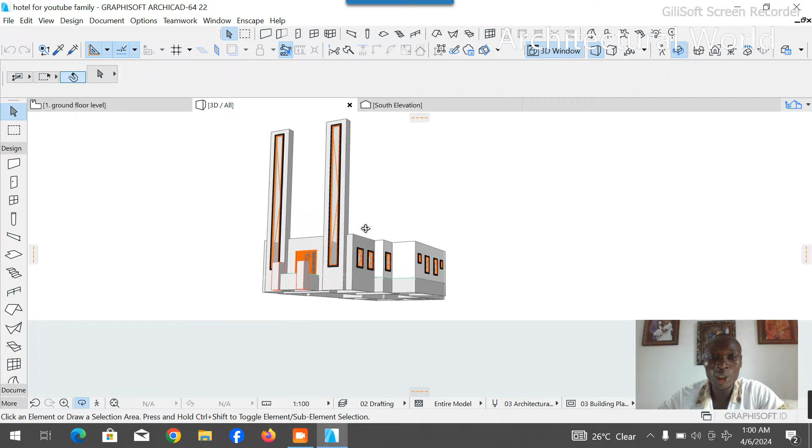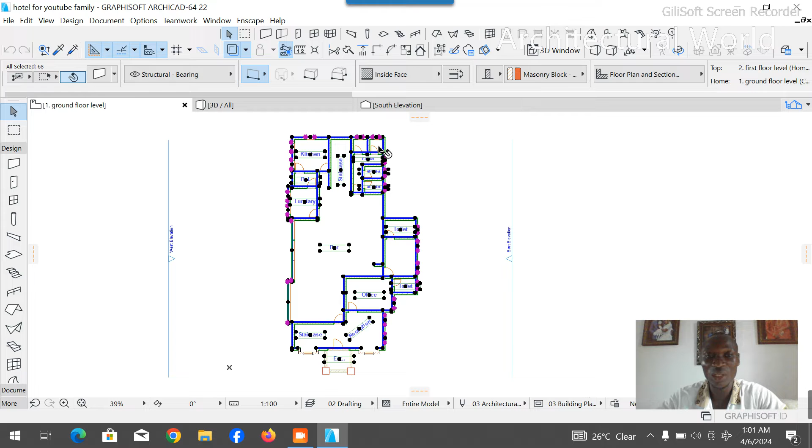So today we're going to put our slab. First, let's put our slab. Now, before we put our slab, I always tell you guys one thing: since you're creating an elevation, though the up part is going to be different, I prefer you copy this wall. Then once you copy this, you uncopy this because you won't be needing this column. Then you uncopy this because you won't be needing this part either. Let me check. Okay, you won't be needing that part either. So you come back here, you uncopy this. Perfect. So right here you'll be needing the rest of the part, but not the internal part, you'll need the external part. So you press your Ctrl C, which is the copy layout. Then we've already gotten what we wanted.

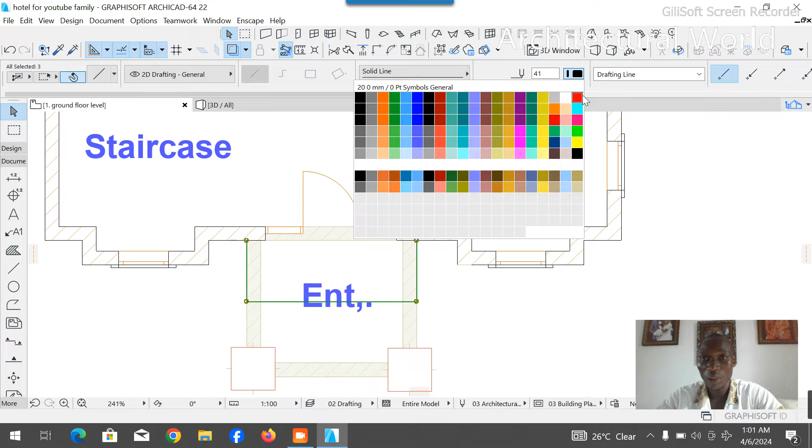So let's put a slab here. First, before you put a slab, you pick your line tools because I want to create a landing, a porch here, so I'm going to make that my porch. Let's say I need 1 meter from here, then I'll come down to the spot, then take this, that's all, 1 meter. The reason I created that line is to have a proper guide. So this 1 meter slab, let me change this, then let's make this dash.

Okay, perfect. So now let's pick our slab tools, pick our design. You come to slab tools, you come this way. So the slab is 150 millimeter, which you know. Then the height, our elevation height - what's the elevation height? Let's check that, let's check the height of our elevation. Is it 3.4 or 3.1? Okay, 3.4, we use 3.4.

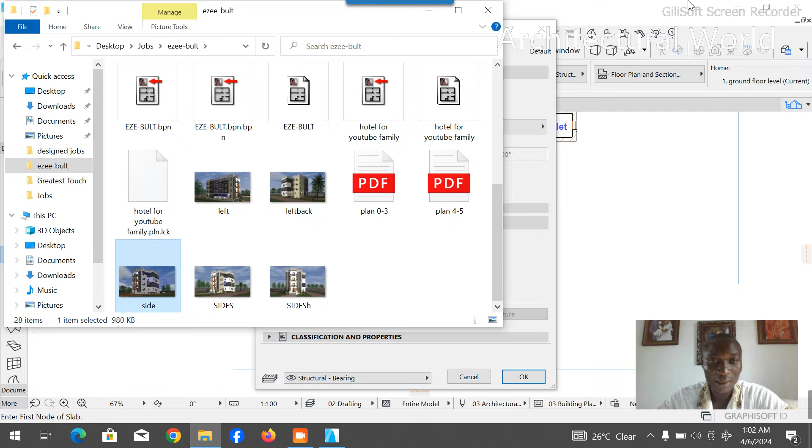So let's go back to our slab tools. Don't mind my voice, it's a little bit down today. So let's go for 3.4 meter. Then let's come here, the top layer is glass. Then the edge, what do you think? Wait, let's look for the 3D, guys. Okay, let's use this. Okay, the edge, the slab is not reflecting, which automatically means it has the same background with this. The slab has the same background with this.

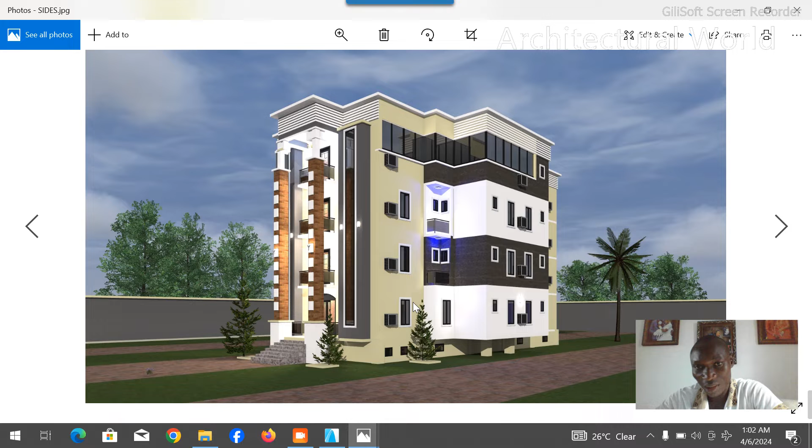Was it this one I was using? Let me check the other side. I have two sides, I want to check. Okay, this is the slab. This is the one we're gonna work with, which means we have to come this way.

Okay, let's pick all this off. Then the slab is okay. Then we'll click. Let's turn this on. Let's put it here.

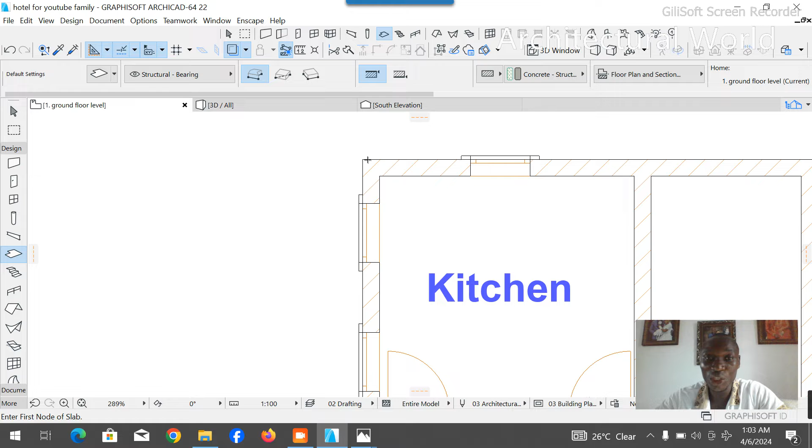Okay, I don't want to rush my class. You know very well that I'm not the type that rushes my class. So I'll pick this edge. Make sure you pick all edges properly.

Okay, come this way. This is how to create your slab. You come this way, you pick this edge, pick this edge, you pick this edge. Make sure you're picking all the edges. It's very, very important.

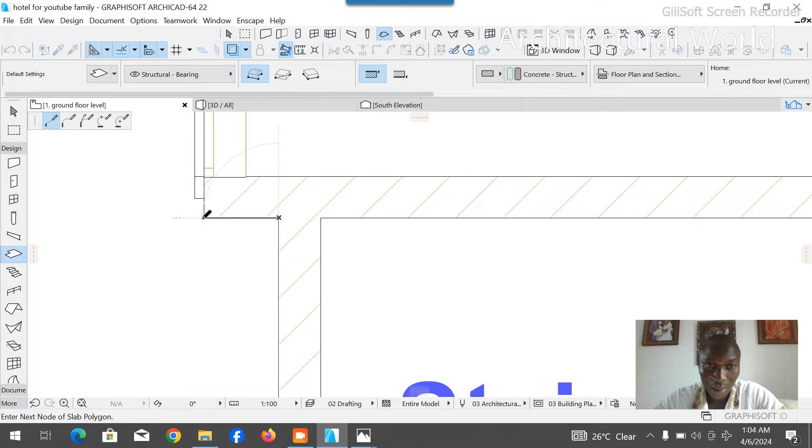Come this way, take this, take this. Okay, almost. Take this, okay, let's go, take this, okay take this. All edges are highly needed.

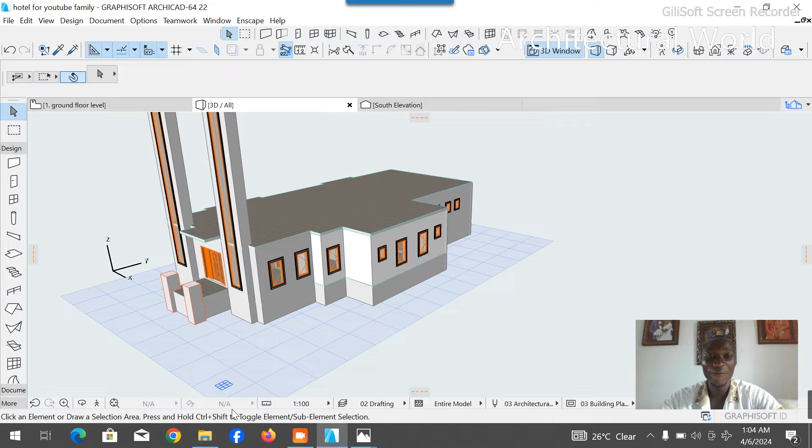What did we use on this page? Okay, I'm going to edit that later. So we have our slab right here. Now this stuff has just been slabbed, you can see very well. It has just been slabbed.

So you can try to see the inside if you so much desire. You can see very well, this is the inside, okay. So please don't forget to save your project, always remember to save your project.

So now the next thing we're going to go to, since we're through with our ground floor, we're through with it. So the next thing we need is our first floor. So from this ground floor layout, you come down to the story, you click your first floor level. We labeled it accordingly, so we're clicking our first floor level.

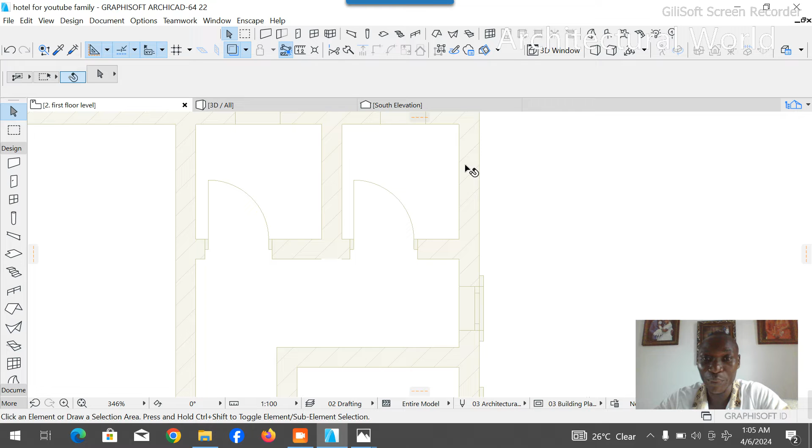Now, if you check for my first floor layout, this stuff is still being printed, that is because the trace icon is being activated. I'll always tell you that. Then if you see this spot that I refused to copy at the first stage is still reflecting, that is because I elevated it to the final floor. So I really don't need to copy it because it's already elevated.

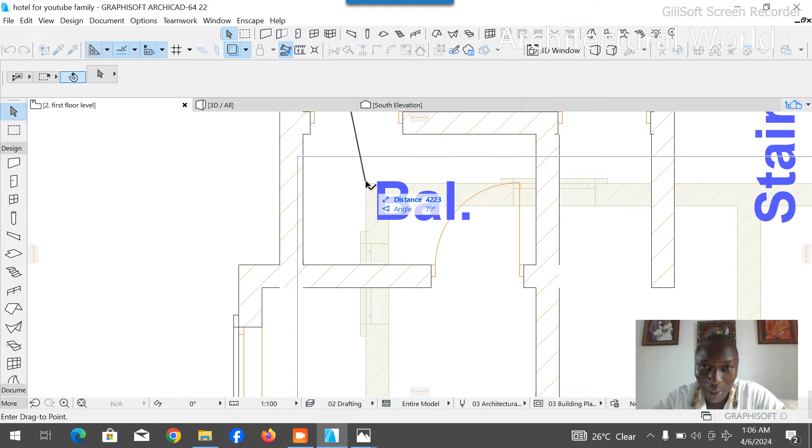So all I just need to do right here is just click my paste layout and paste this item right where I want it. Now I'm going to use my Ctrl D, then pick it to match the merge. I'll come here, I'll paste it here. Okay, perfect, now I have what I want.

Let's see that on 3D before we edit. Perfect, you see, I just created my first floor. You can see it very well, I just created my first floor. This is the first floor, but the setting of the first floor is different.

So now what do I do? I come down to my story, I'll go back to my level. Now this is where I'm to create my rooms. I'm to create my rooms here, okay, I'm to create all my rooms here. So how do I do that?

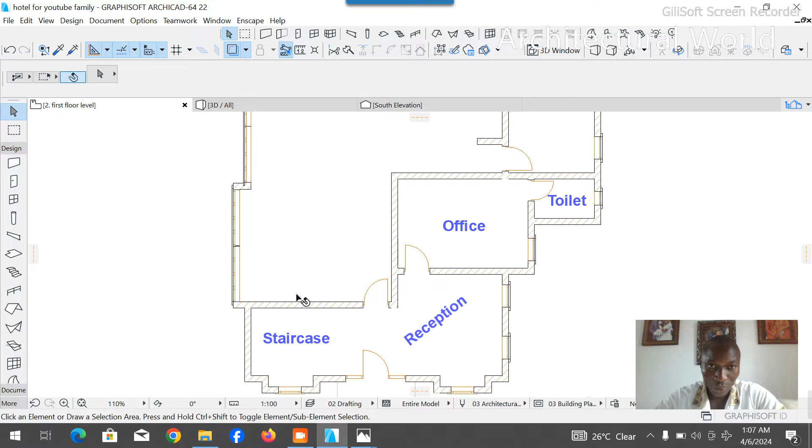Now, I have to scatter the whole of this thing, excluding this staircase. So where should we start from? Okay, let's start, let's take this angle first. This is no longer reception because we're trying to create another room here. So always use your line.

At this spot, you need your line tools. So now let's look for 3.6 meter. Let's check something. Exactly, this 3.6 meter, and let's look for 3.4 meter, 3400. Okay, okay, this 3400, this 3400.

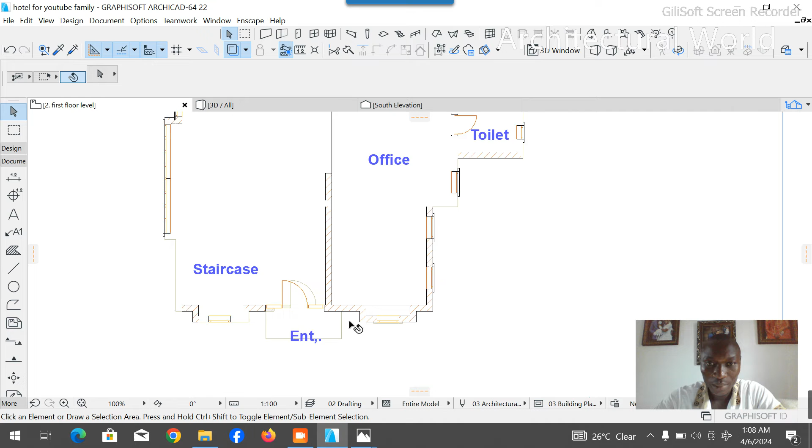So I need this wall to be here, then I need this door a little bit backward to the spot. Okay, perfect. So the same thing is going to occur from the ground layout. Same thing is going to occur. So now I have my 3.1 meter.

Okay, I don't need this wall, this door, I don't need this door. Now I just got a room. Please follow up what I'm doing. I just got a room.

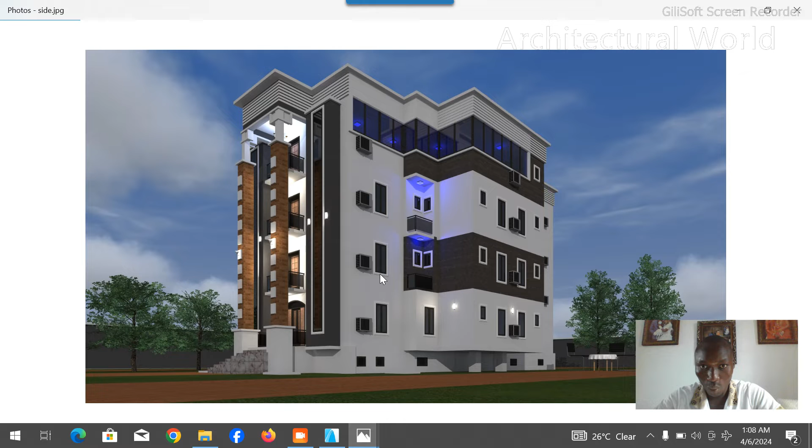If you check our 3D, we are having just one window here, even from the reception. So why did I create two windows? Let's check something. Okay, we're supposed to have one window. So I think maybe the ventilation was hot. I think this two window is pretty cool though.

Let's say we already have this as a fixed light. This place is not accessible, so one window for this space is pretty much going to be hot. So let's try the two window. If it doesn't fit in, we'll pull it out.

So the next wall we are looking for is 1.23, 1 meter. Okay, let's say 1243. 1243 is the next wall we are looking for right now. Okay, that's the toilet to this room.

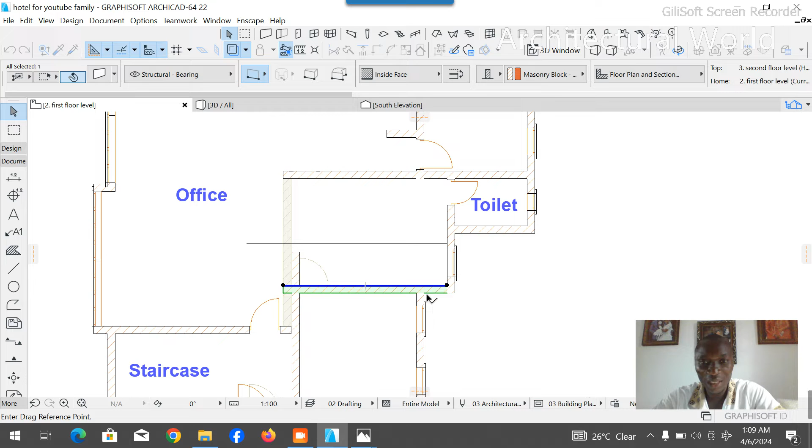So let's take this to the spot first, then create a copy of this and merge it here. Perfect. So let's take this off, then increase this to match this even above. Right here, we can turn off the trace so you don't make a mistake. So let's cut this off and cut this off.

Then let's have a toilet here of... let's have a toilet of 2447. Okay, because the leftover part is going to be walkway and lobby.

So let's take this wall here, copy this wall to the spot, cut this off, cut this off, and take this off. Okay, then let's cut this off. Perfect. There's going to be a wardrobe here during the finishing.

So we have the first room here. Okay, so we'll be creating, designing, and putting our doors at once. So let's have our first door here. Sorry, my bad. So let's have our first door here.

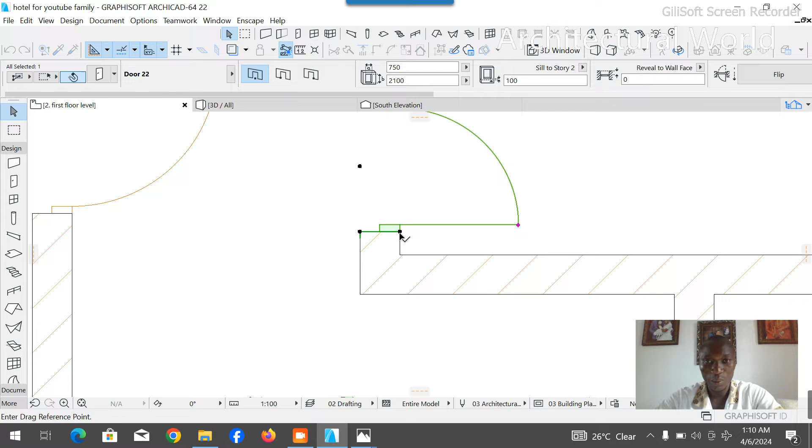Okay, then let's change this door to 750 millimeter, toilet. Then let's have our entrance door here. Okay, perfect. So we have this here. Okay, so it's the owner's choice. They could either put this door here, but I always prefer my doors to have a resting end.

So let's label this toilet. Then let's label this room 2, because we already have room 1 on the ground layout. So let's label this room 1, room 2. Okay.

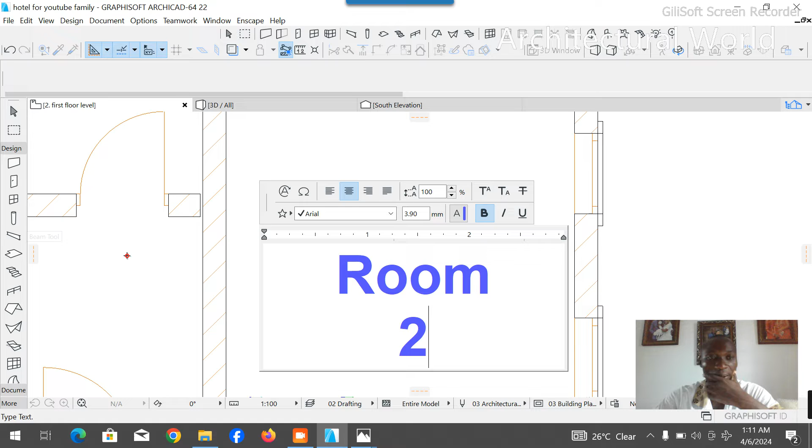Now we're going for the next room. For the next room, room 1, room 2. Okay, there's going to be a complication here. Now let's pick the next room, toilet.

Let's go back to our document and pick our line tools. Then let's pick a toilet of 1.3 meter. Is it fit in? 1300. That's what we need here, toilet of 1.3 meter. Then let's split this wall to this first because I need it.

So let's bring this wall to the spot. Okay, so let's match this upward. Take this off. Okay, so we take this off. What do we need? We need a length of 3172. Okay, 3172.

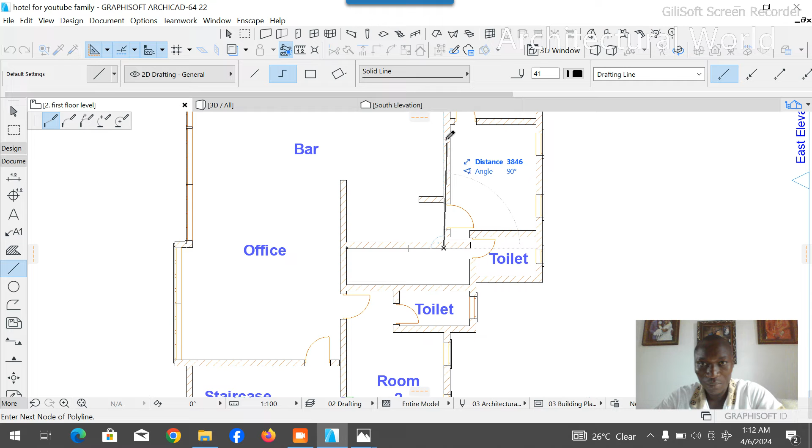3172. Okay, sorry, my bad. We need a length of 3.4 meter, 3400. Exactly this wall. So we have this wall right here.

So we are taking this door away from the ground layout, taking this door away. So this should match this spot. Okay, so we don't need this door either. This is the ground floor we're trying to scatter, so don't get confused. You're taking away the ground floor.

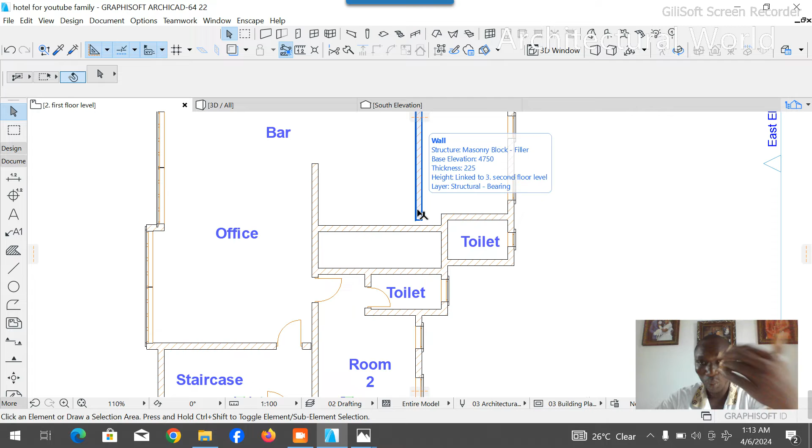So I'm trying to work what I want, the way I want it. So now I need a toilet wall here. And first, let me align this to this wall. Then I'll pick my line tools.

I'll take 3172 from here and paste it here. Okay, so I'm creating a toilet wall here and I'm going this way. Okay, I'll take this off.

I need a window here, no matter how small it is. I need a ventilation to this toilet. Let's try 500 millimeter. Okay, perfect.

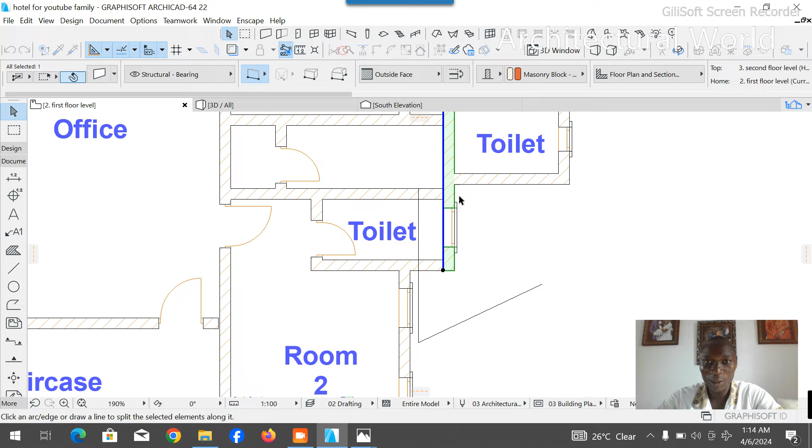Then let's trim this wall. Let's split this wall off and bring this wall back. Let's move this wall back to here. Adjust this toilet this way. Okay, I think we should take this off, then move this backwards to this, then take this.

Let's leave that to fly first. What do we have here? 750 on 5. What do we have? What's the size of this window?

Okay, this is wrong. So let me check the setting of the window first to see if it is a toilet window. Okay, so I'm going to change this window to 500 millimeter, the width, then I'll change the height to 750 millimeter.

I think that's what I'm using. Let me confirm it. Okay, 700 millimeter. That's what we're using, 700. Okay, then I'll change the sill to story 2 to 153. I'll do the same editing here. I'll change this to 500, then change this to 1530, then change this height to 700.

Okay, perfect. So what do I need? I need a window here. So let's go to design, I'll pick our window tools. I'll change this to 500, same way. I'll change this to 700, same way. Then I'll change this to 153. I'll place my first window here. Then I'll move this, rotate a copy of this and paste it here.

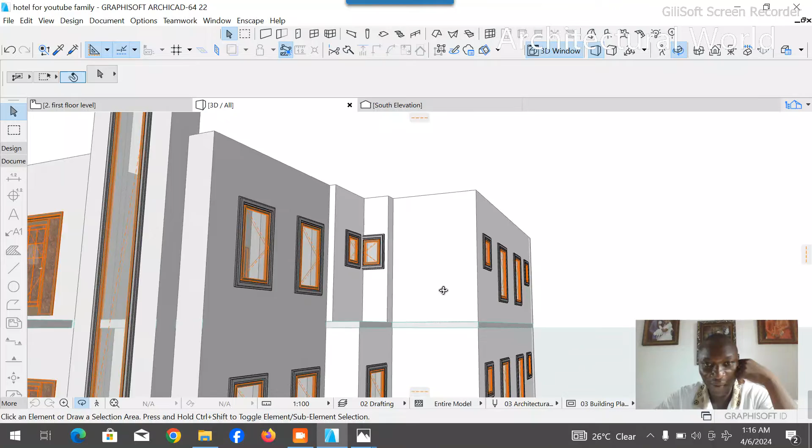Perfect. So let's take away all this because we won't be needing it anymore. Likewise, let's take this off. So we have this, let's check that on 3D. Okay, you can see we just created this. Yeah, this is what we're currently working on.

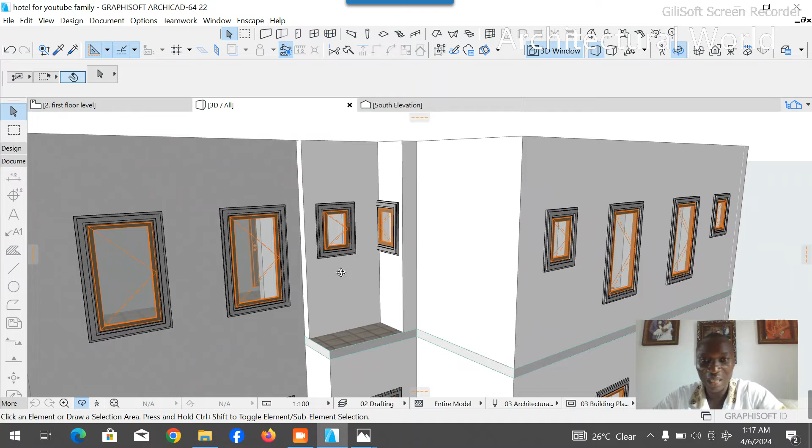This is like cross ventilation, so let's just move this window to come this way. Since there is a space there, let's move this window a little bit, so it doesn't look like the air are competing with distance. Okay, I think I'm cool with this. So let's have this have opening to this way, while this have opening to this way. It's perfect that way. So let's go back to...

Okay, toilet, this toilet. Perfect. Now the door of the toilet ought to be this way, so I'm changing this door to this. Okay, reduce this to come this way.

Okay, perfect. So what next do I need? I need a room of 3.2 meter. Let's say 3203, that's what my design stated. Okay, let's have this here. Let's increase this.

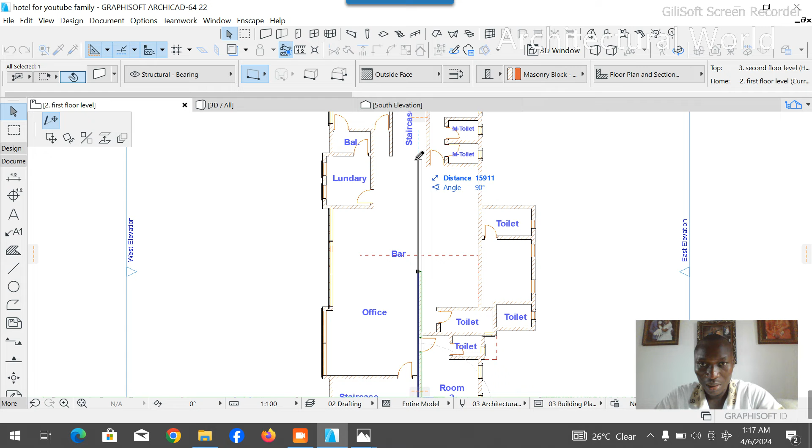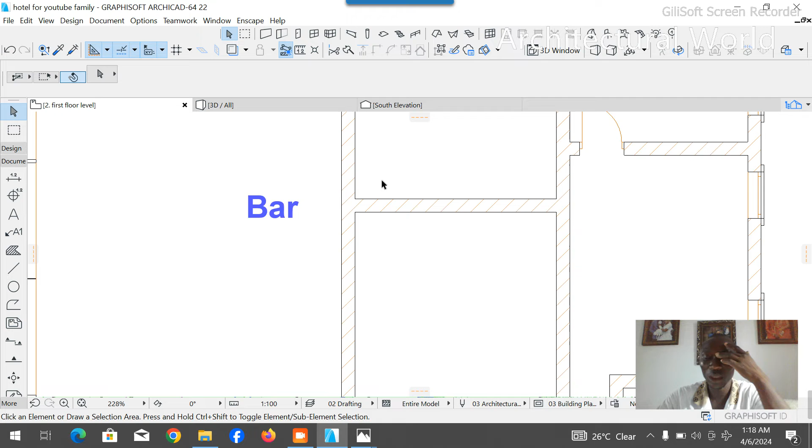Let's go. Let's create a wall here. Move your wall here to this. Copy, paste here. Take this off because we won't be needing it. Align to margin. Okay, now we just have a room.

This room is using external ventilation. That is what this room is going to use, external vent from the walkway. Definitely there's going to be AC everywhere, so it doesn't really matter though. So that's why this is like a room that needs its ventilation from sunlight. So it's going to be more of AC.

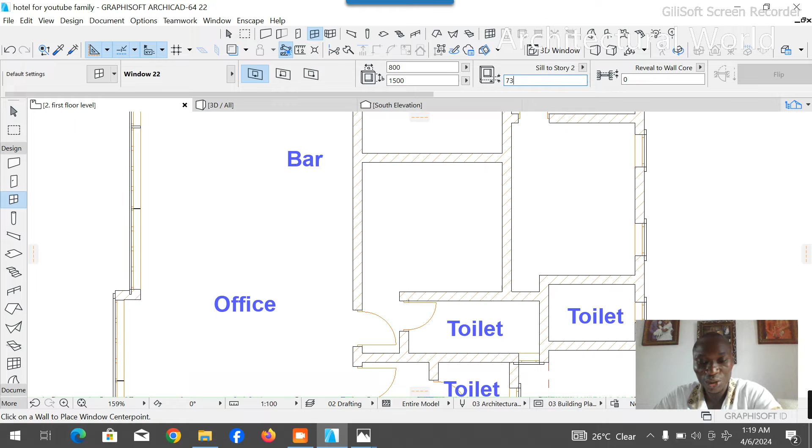Okay, so now let's put our window here. Let's go for 800, then let's go for 1500, then let's go for 730 G to sill. So we have the first window here, we have the second window here. So let's rotate a copy here.

Let's rotate a copy here. Okay, bring this to the spot. Please, you know I don't rush my classes, so kindly be patient with me. Okay, so we have this. Let's see that on 3D.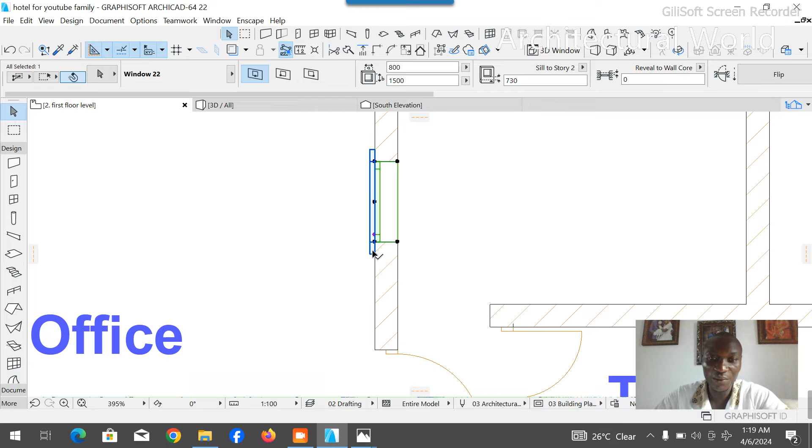Okay, you can see it very well. This is the room we just created. Sometimes when you are creating things, always make sure to follow them up, so it's going to help you a lot. Let's drag this off, so the middle can be used for TV, or for bed at length, whatsoever or howsoever is being arranged.

This is just sunlight, this is just sunlight. Let it not be like it's a sealed room. That's the purpose of this window. It shouldn't be like it's a sealed room, and it's going to be a slide window, so it's not really that necessary, but let it not look as if the room was sealed. So that is the reason I'm creating that stuff.

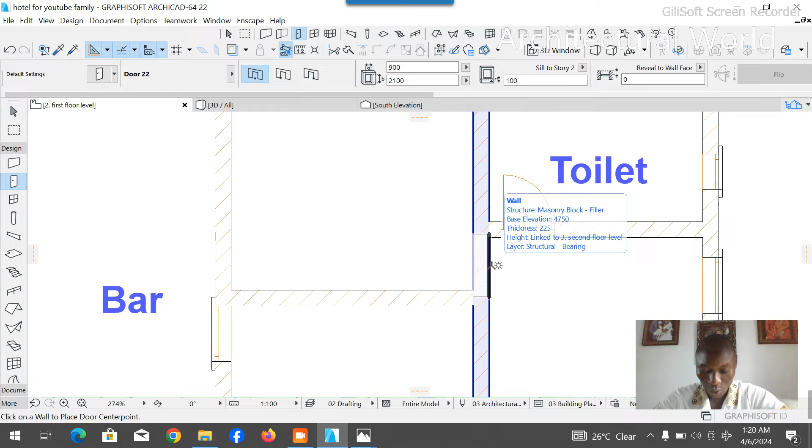So let's align this to the spots and create extra benefits for this particular toilet. Okay, now what do we need? We need a walkway between these to access this. First of all, let's put our door, let's put a door here, a door of 900 on this spot. Okay.

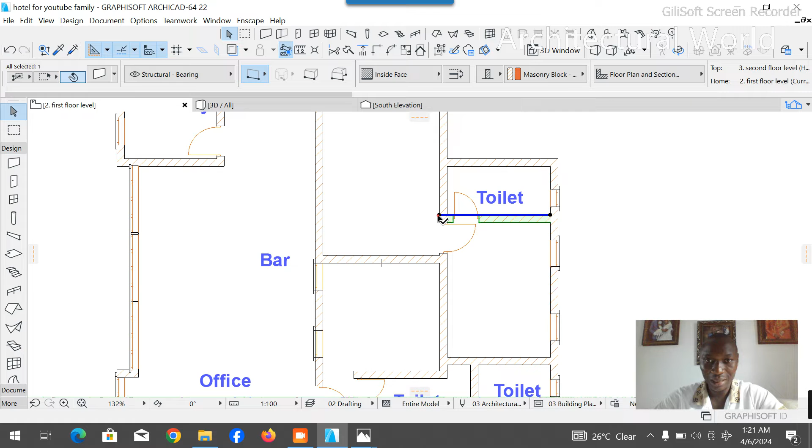Okay, 900 on this spot. So that means this has to go back to this spot. Okay, we have the 900 there. So let's create a wall here. Let's allow this wall to fly. This is the lobby to access this room.

Now you go through these to access this room. What's this? This room 3. Okay, this room 3. Now we have this room.

Let's have our room door here, toilet door. That's 750 millimeter. Okay, toilet door. Then let's take this toilet door off because it's no longer needed for this room. So this is gonna be room. Let's say 4. Let's make this room 4.

Okay, room 4. Later, the owner is gonna label it the way it best suits him or her. So I'm just trying to create my design. So what do we need now?

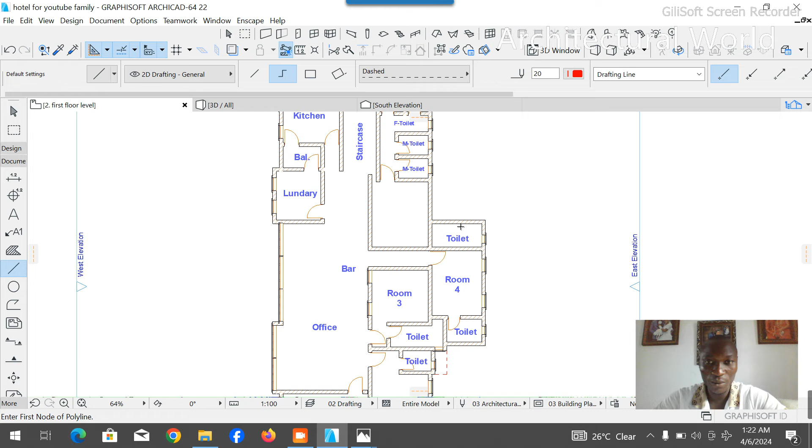We need another room of 3.4 meters. We need another room of 3.4 meters. So we're going to pick our line tools and boom, 3.4 meter, 3400.

Okay, 3400. So I'll move this wall to this spot. I'll move this here to this spot. Then I increase this to this. I take away my guide. Okay, that's 3.4 meter. So it already has its own toilet.

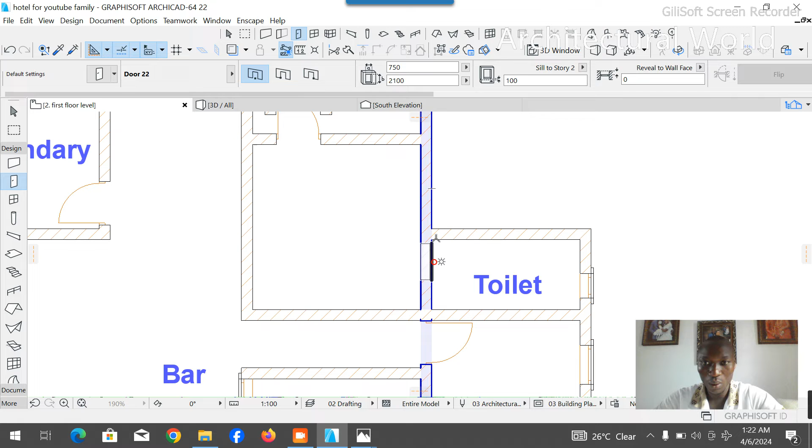So I'm just going to put my toilet door. I'll go to my design, pick my door, then put my toilet door here. Okay, then I'll go to my window. Let's come to window. I'll put my window here.

I'll copy my wall extra. I'll create a copy, duplicate, and move one copy here. Okay, I have that. So what do I need? I need the entrance door. So I'll come here. I'll put the entrance door of 900 millimeter and place it here.

Okay, now this is room 5. I'm just taking them step by step. This is room 5. Okay. Please always save your project.

So what do I need next? The next room I need is going to be 3 meters. Let's look for 3 meter room, more in length. Let's check 3 meter. Okay, 2950. That's what we're going to have here.

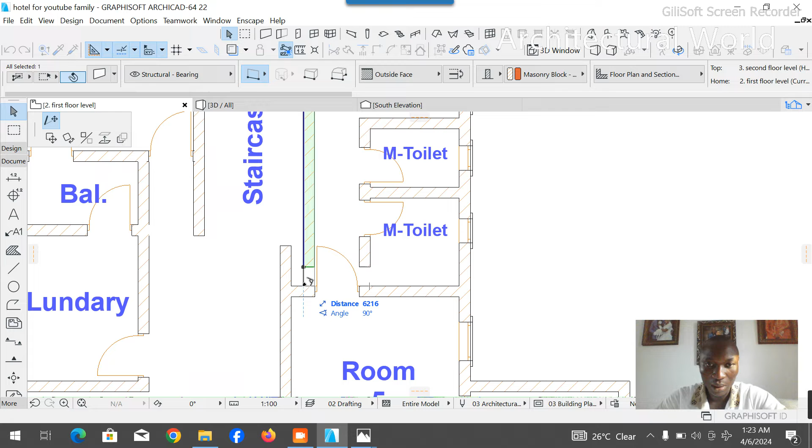Let's come this way. Let's take this off. This is a staircase room. You can't alter it because it's flying from the ground layout, so you can't touch it.

So let's say 2 meter. That's 2 meter. Okay, we'll take all this off because we won't be needing all this stuff. We take all this off. Then we'll take this off likewise. Then let's have our door here. Let's put our door here.

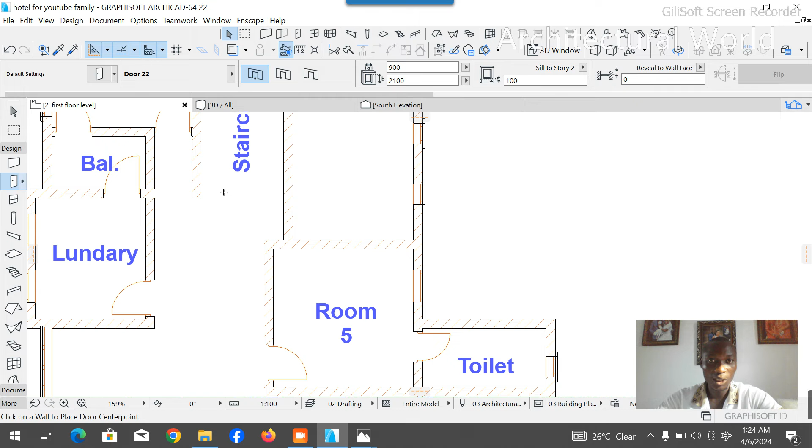Entrance door. Okay, so that's going to be, we're looking at 4.1 meter. I told you it's going to be more in length, so we're going to take 4.1 meter from this wall. 4.1 meter, let's say 4100.

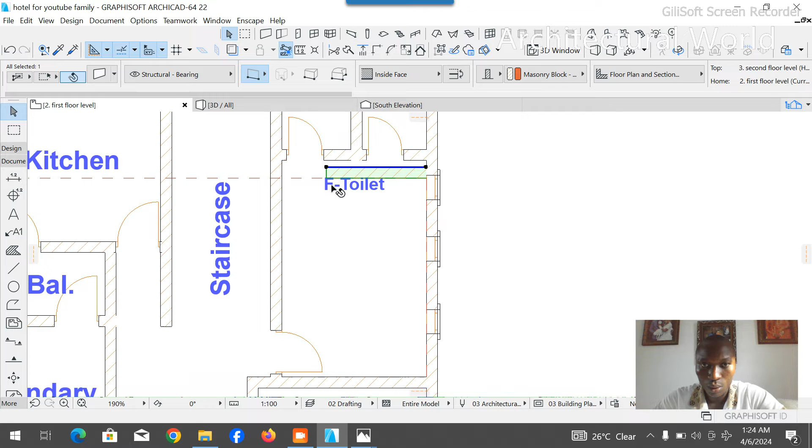Okay, keep your guide here. 4100. You move this wall to this wall. Okay, we expand this to this, delete our guide. Okay, we take this off.

Now these are all toilet doors, so we don't need them. All toilet windows, so taking all off. We take this off, take this off, and take this off.

So we will be needing double window here for ventilation. So we place the first one here, take the next one, place it right here.

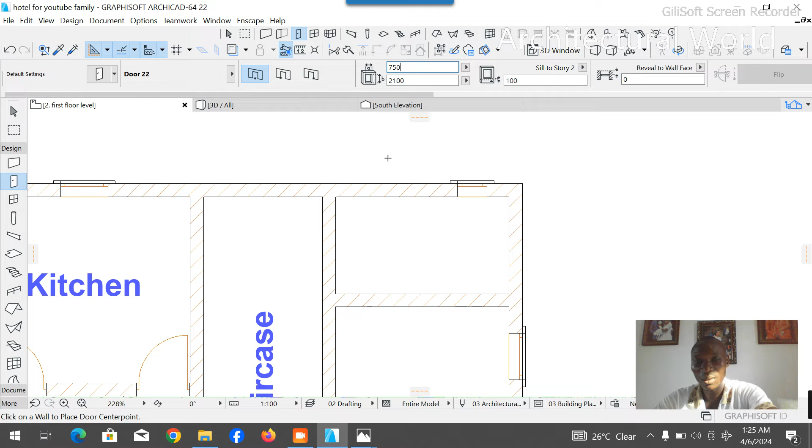Okay, now we have here to be the toilet. So we take away one of these windows. A toilet cannot have two windows, it's not possible. So we just come back to our design tools, pick our door layout, then reduce our door size to 750 millimeter, then place it here.

Okay, now we have our room 6. Okay, then let's take our toilet tools. Let's paste this here.

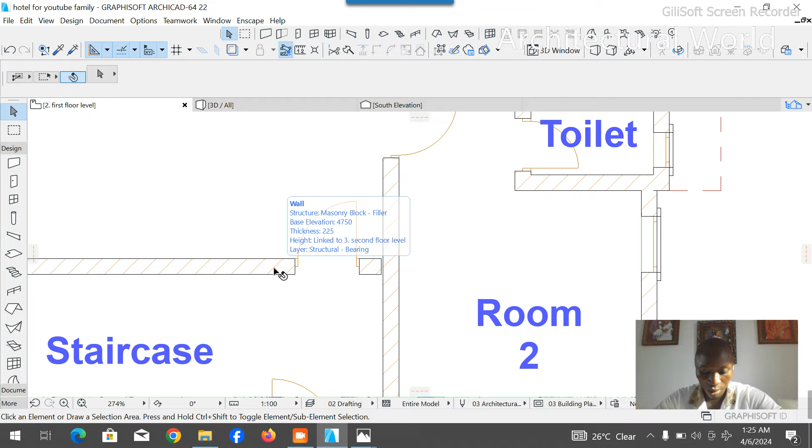Okay, now guys, you can see we have our room 1. This is the reception. It still has to flow. We really don't need this door here. Let's just hold on. We have our room 2, our room 3, our room 4, our room 5, our room 6. You can see, like I always tell you guys, you have to learn how to minimize and maximize your space.

You can also learn how to use the little space you have to create that amazing design. If you check this well, you can see the arrangement looks complicated, but it's well arranged. This will help you outrun any kind of wastage.

This room was supposed to be a waste, but it was created from the smallest part of it, and the room size is okay. Let's check the room size. Let's pick our line tools. Let's say we have a room size of 3.4 meters by 3.1 meters. So at least it's perfect.

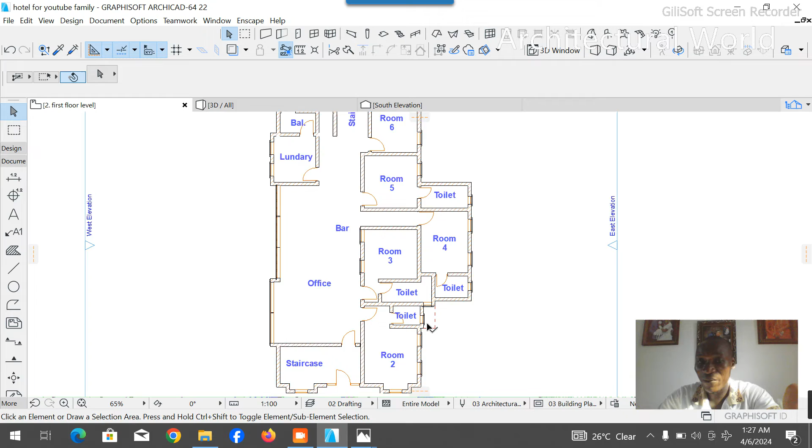Now it has its own toilet. We might have an issue of how the toilet is going to have ventilation, but let me show you, it acted like extra beauty to the design. I was still able to create a form of connection between the toilets, just for the ventilation to push through. So always bear that in mind.

If a client contacts you for a job, it's because the client wants you to use your brain while he pays you the money. So don't just design because you want to create design. You have to design because you have the passion to do the job. It's only when you have the passion that you can have the pay.

So let's continue from where we stopped. Let's pick it from this angle. Now we're looking for a room of 4 meters. 4 meters, okay, that's what we're looking for right now. Perfect.

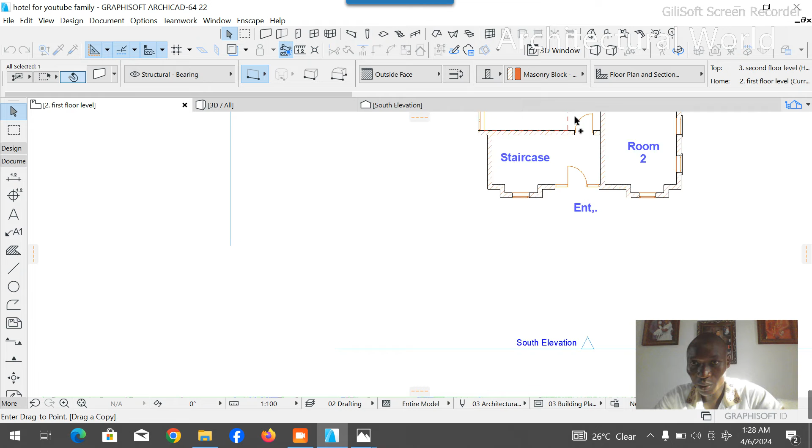So we're going to take this wall, I need a shorter wall because it's going far. Okay, let's come this way. Let's place this here. Then I have to take this off, then expand this. Okay, now this is my lobby. I told you I don't need this door. This is my lobby.

Perfect. Now let me check the size of my lobby and see if it's okay. 1.3, I think that's perfect. Not bad for a lobby. 1.3 is okay. So we'll bring this here to this. We just collected 4 meters, I think so.

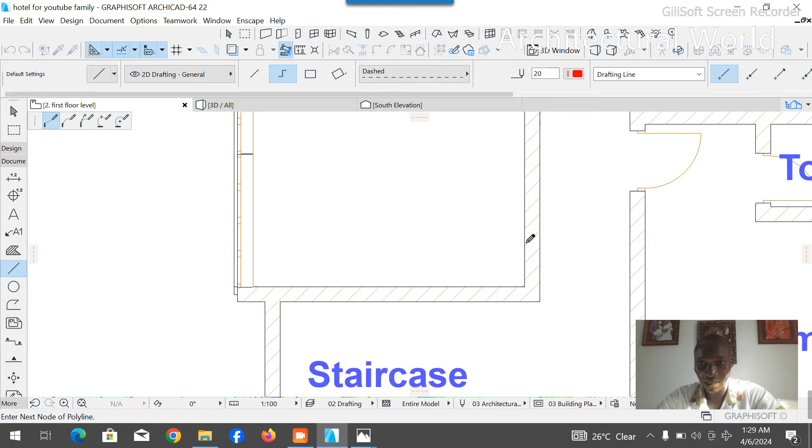Let's see something. Okay, I need 4 meters, exactly 4 meters, because this part is like executive. So you zoom to match. Okay, that's 4 meters.

Whew. Okay guys, I'm late for work, but I still have to do this.

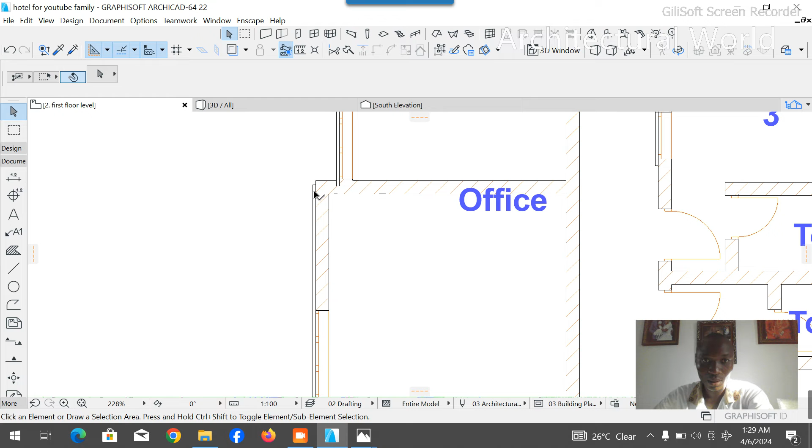Okay, 4 meters square, that's what I want. Perfect. So I'm going to drag this to fit in this. Let's go, let's put this here. Let's take away all these because we won't be needing them right now. Let's take this off. Okay, let's take this off likewise.

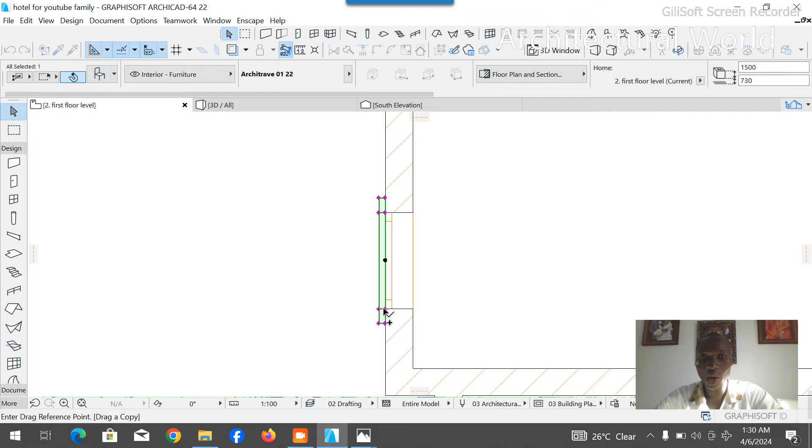Let's go to our design, pick our window, place the first window here, place the second window here. We'll come back to the spot, create a copy of this, duplicate, move to match. Whenever I'm creating a design, I always like doing the model at once, so I don't have to be coming back and stressing myself. So let's pick our door tools.

Okay, first let's create the toilet on this wall. Let's take these glasses off the spot. Take this off, sorry. Okay. Zoom so you can see what you're clicking. Okay.

Okay perfect, so I need my design tools, documents, I'll pick my line. I need a toilet of 1.2 meters, 1200. Okay, so we'll come this way, we'll duplicate this wall to fit in this. We'll take this guide off, cut this, mesh this. Okay, for proper connection.

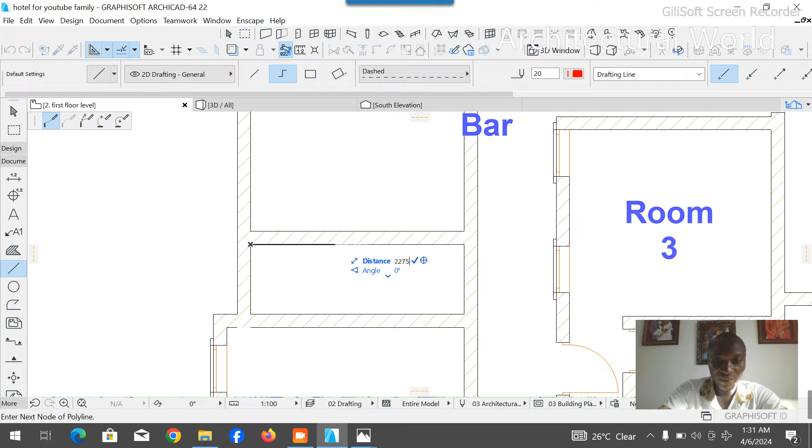So we'll come here, line tools, we'll pick two, take 2275. We'll create a guide here, pick this, we look for this, create a copy of this. Okay, paste it there. Let's take this off and take this. Okay, let's take this door off and take this off likewise.

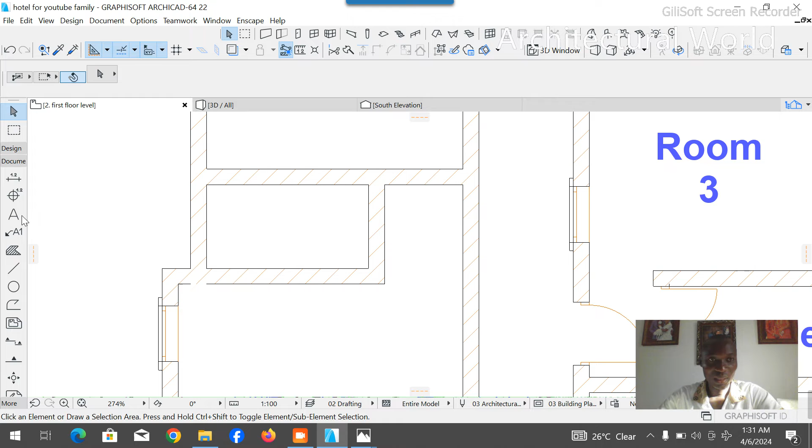So we'll go to our design, we'll pick our door tools. We have our toilet here. Toilet door, we change this to 900 millimeters. Change this to 900 millimeters and have your toilet.

Okay, let's have the entrance door here. Then let's have the toilet door here. Let's take this to 750 millimeter. Then let's create it here. Okay, perfect. So what's this room 6? So this has to be room 7. This has to be room 7. This has to be room 7. Okay, then this has to come down to this.

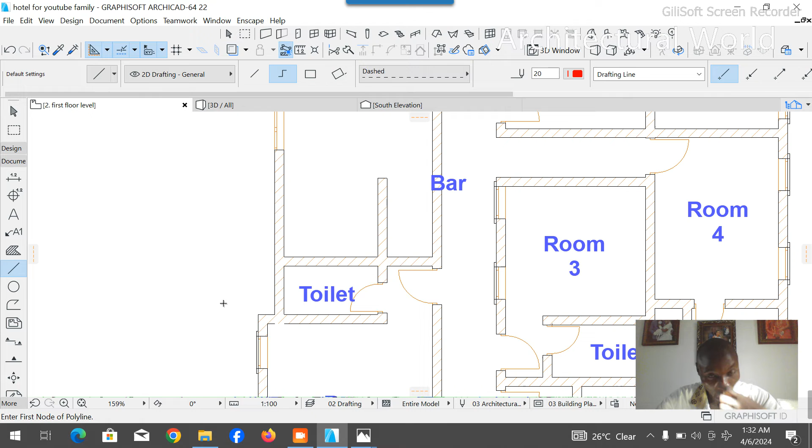We'll copy this. Okay, now what do we need? We need another toilet, so let's increase this. Okay, so we'll come back to our design tools, documents, line tools. Both toilets are equal, 1.2 meter, 1200. Okay, take this, bring this, create a copy of this, paste it here, delete this off, take this off, take this off, go to design tools, door layout, 750, place it here. Okay, we change this to 900 millimeter, place the entrance door here.

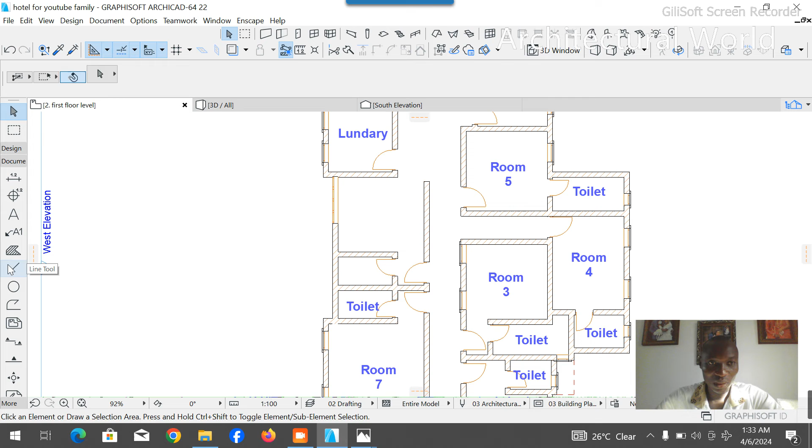Okay, bar, we don't need this. Then what's the size of the room? We need a room of 3.750. Let's go to our design tools, document, line tools, come here. It has to be equal. Okay, so let's use this as a room size. Let's take this off.

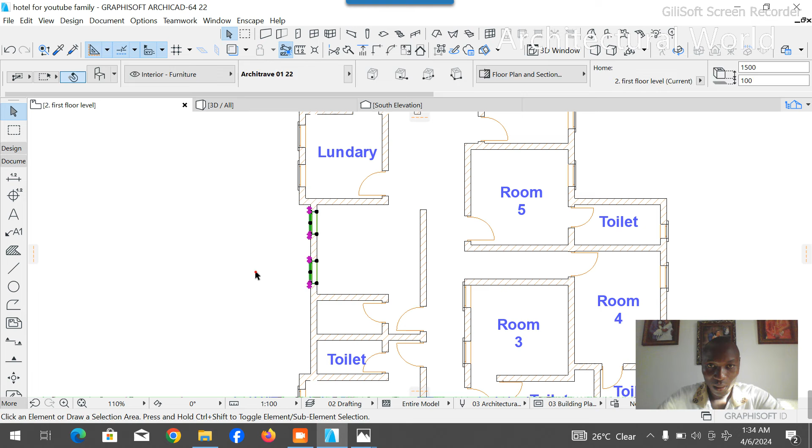Okay, so we need our window here. So we can easily copy this window because it's on same line. So you can easily copy what is on same line. So let's create a copy of this and move to this spot. Okay, perfect. So we have to increase this to go. Then allow this to merge here. Okay.

This was supposed to be a straight line coming to the spot, but I figured it out that the room should be smaller, so I decided to wave it out a bit. So the staircase comes, you land through this way, and you access it through this way. So I think that's perfect.

So let's go to room 8. This room 8. This room 8. Okay, then there's the toilet.

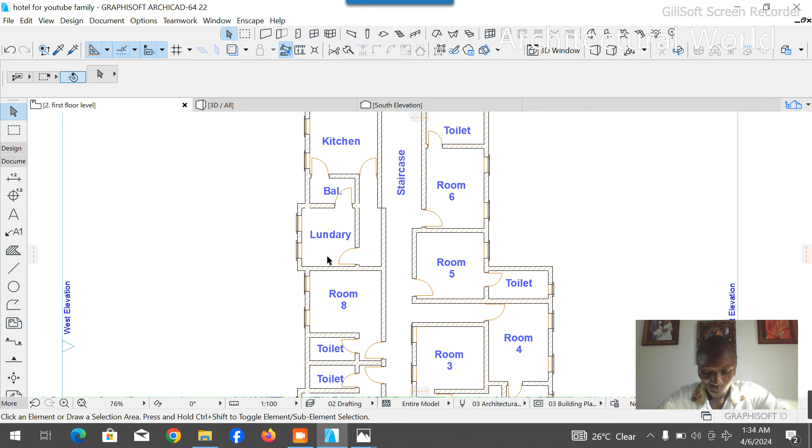Now we're looking for room 9. So first we need the toilet of room 9. Taking all this off, taking all this off. Then let's look for the toilet of 2 meter. Room 9 is executive, so we're looking for 2 meter for the toilet, 2 meter for the toilet.

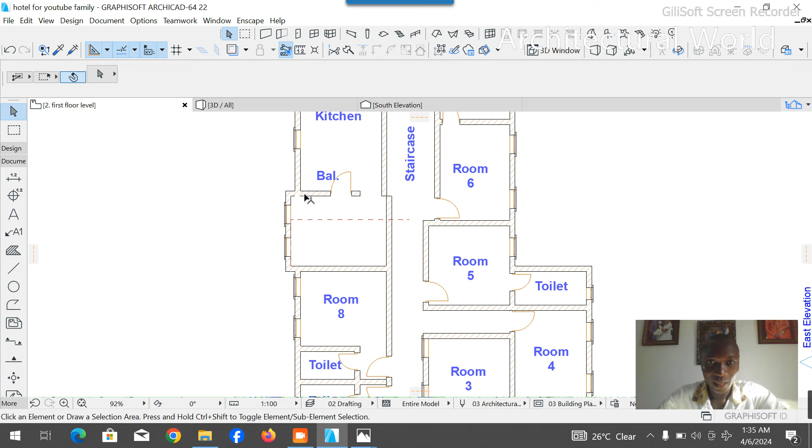Please don't forget. We'll come down this way, paste it here, increase this to match this. We take this off, take this off. We won't be needing this door, this window won't be needed, this and this. Okay, we haven't even put windows on this, so let's take this off and let's take this off.

So room 9, this room 9 super executive. This room 9, you can see how executive it is. Okay, toilet. So let's go, let's pick our line tools.

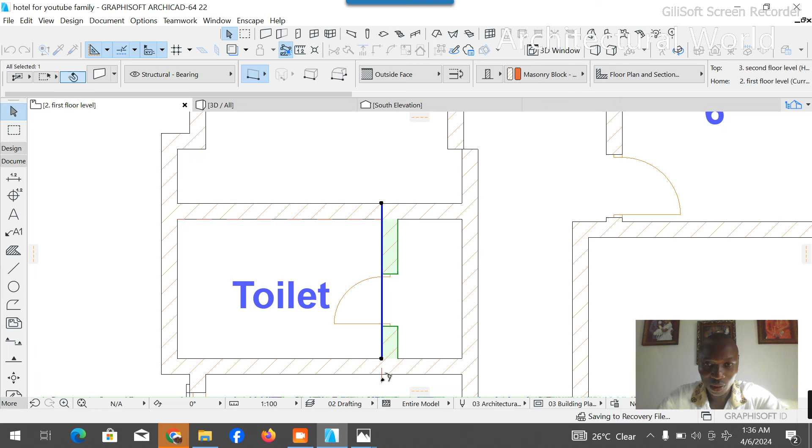Let's use 2875. Okay, 2875. Let's look for a small one to copy. Let's copy this. 2875. Let's paste this here, bring this to match, delete this off. Okay, let's make this here, bring this way, we call this off.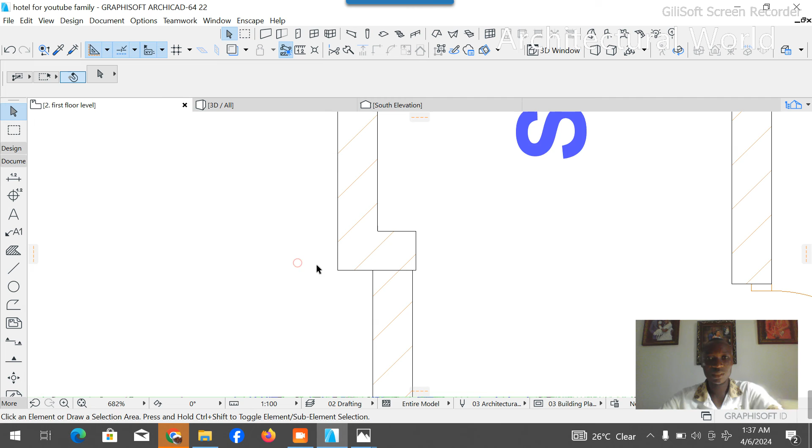Okay, there's going to be a small connection there, so I think this has to work here. Okay, perfect. Let's connect this, then let's connect this to this, then let's bring this, then call this off. Okay, we have it right where we want it. Let's bring this to this. Okay, well connected, so increase this to this.

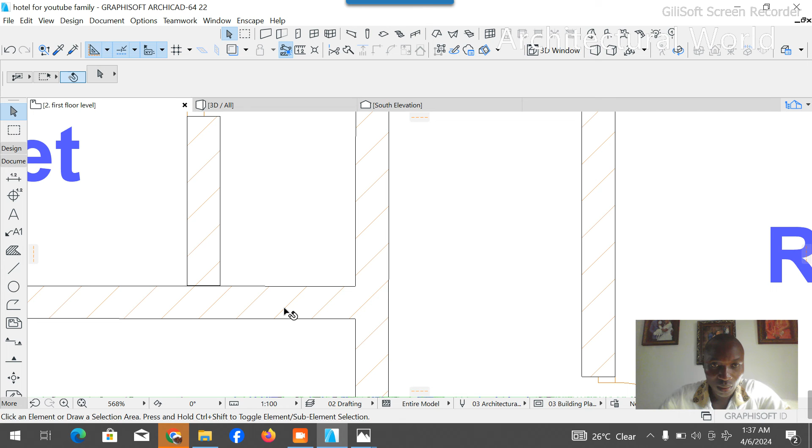There is a bent wall here. Whenever you're merging walls, make sure it's on a straight line. It's very, very important. Make sure that wall is on a straight line. So we'll come to our design tools, we'll pick our door layers. We have our door right here.

Okay, now let's drag this window this way. This toilet window. Yes, let's confirm. Okay, it's not toilet window. So let's bring this to match this. Okay, now we need our toilet window.

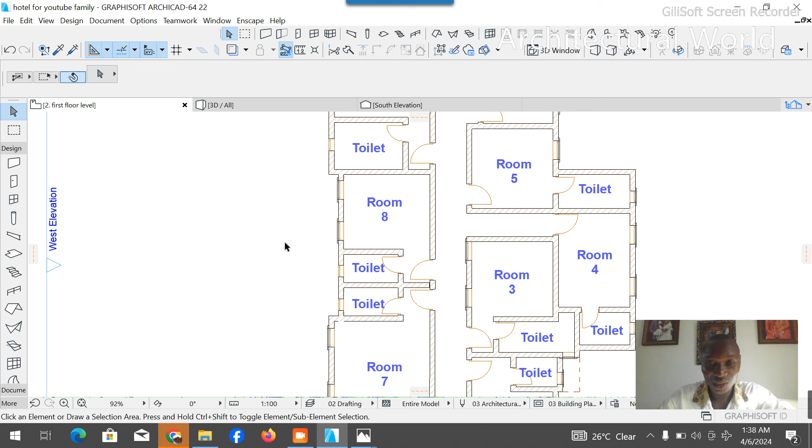We'll come down to this place, we'll go in 500. We come down to this place, we'll go in 700. You can't copy this toilet window because they are not on a straight wall. You can only copy walls that are on straight, same flight. Okay, let's have this here. Let's have this here. So let's go look for this first.

Let's copy this. We need a staircase light, so we need a window here for the staircase. Then we need another staircase light here. We need a window here for the staircase. Okay, perfect. So let's rotate a copy of this to this way.

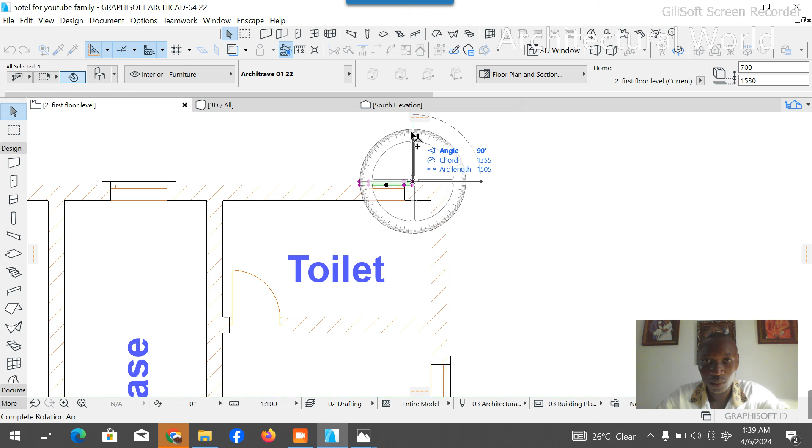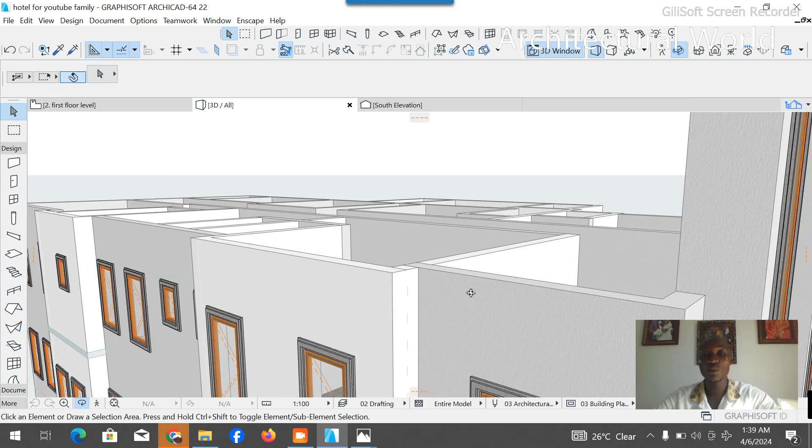Okay, let's paste in all the areas we have our toilet windows. Let's keep pasting this. The beautiful part of this is that what you have on this first floor is what you're actually elevating. So let's see that on 3D. Perfect, you can see we have everything right here we wanted. It's just to adjust the down floor door.

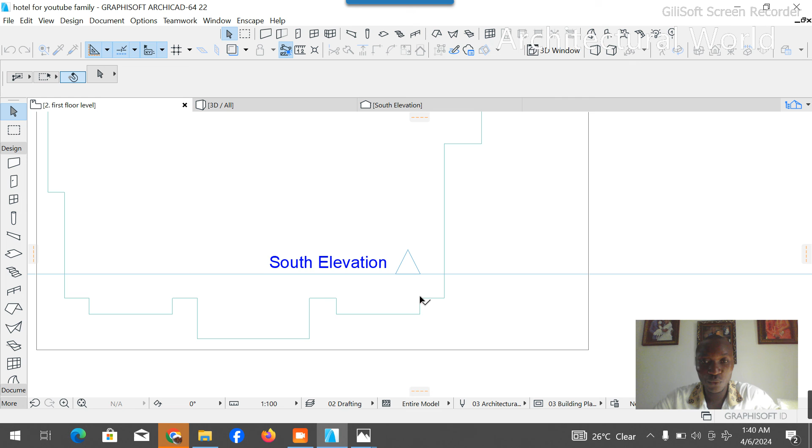Okay, so let's go to our first floor. Or you can easily copy this slab. Let's create a copy of this. I want to copy this slab. Let's copy this slab. Okay, then you come down to your first floor, paste what you just copied here. Okay, so let's move this to match, move it to match.

Okay, perfect, so let's see that on 3D. Perfect, you can see what we just created. All elevation is coming out. So from this first floor, you can easily elevate it all. So let me just show you how to elevate it all to the third floor, because it's only the third floor that has editing.

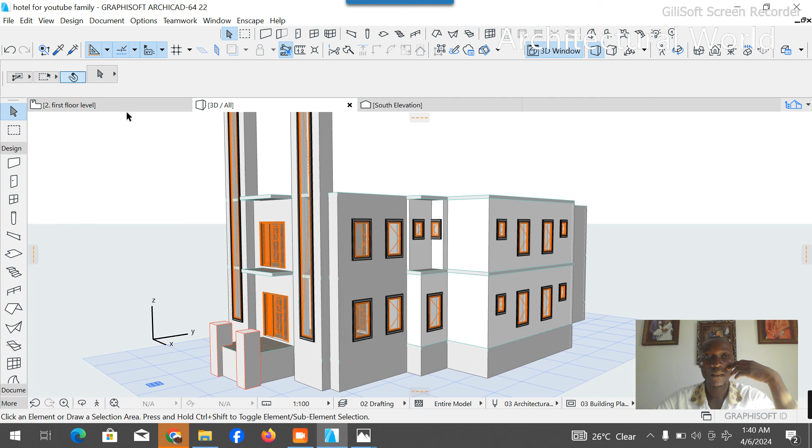So let's come back to our ground floor. Okay, so we'll copy the whole of this, excluding our normal walls, being these walls. The walls we normally don't copy. We don't copy these walls. We don't copy these walls either. We don't copy this wall. Don't forget, this wall is already elevated, so we don't need to copy this.

Then let's copy, create your control. Control C, I just copied. So I'm coming down to my second floor. My trace is already on. Turn on your trace if it is off. Then you paste this. Paste. Perfect, you click OK. Then let's see that on 3D.

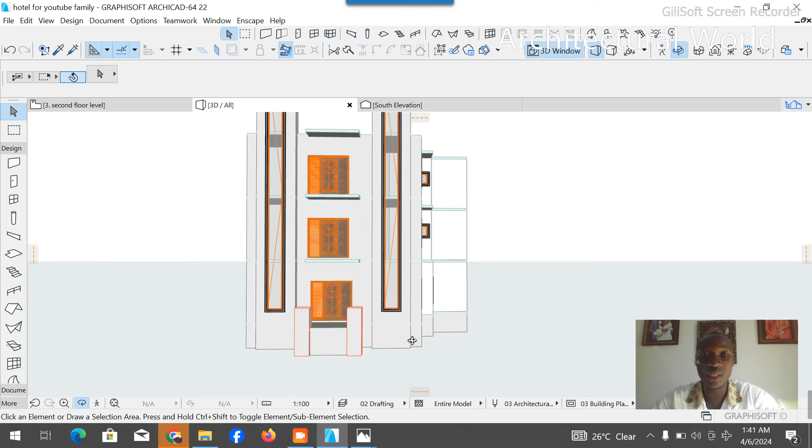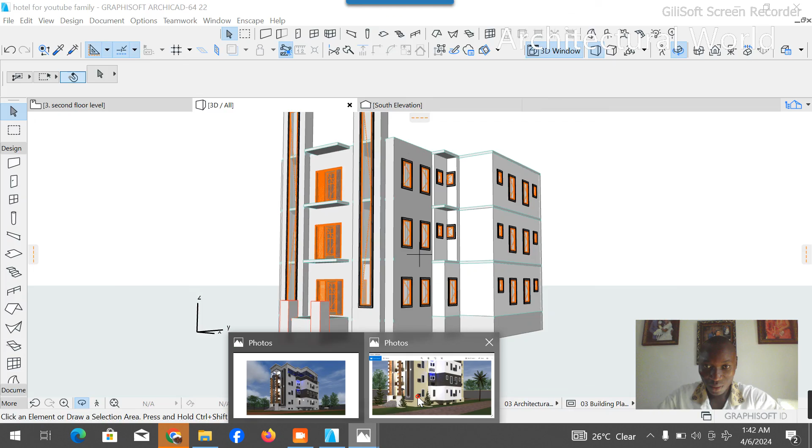Okay, you see, I just added another floor to this. You can see where another floor was just added to this. Then this particular floor that was added, let me see, I just added another floor to this. Let me see how it goes. Okay, the same floor, let's check the 3D. First floor, second floor. Okay, it's same floor, so we can still use the same stuff for the final floor before we edit the room settings.

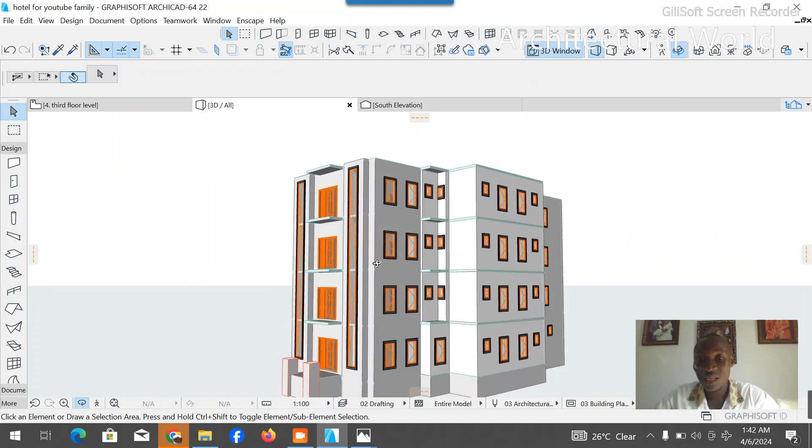So let's come down to our third floor and paste the same stuff here. Just paste it, click OK. Then let's go. Perfect, perfect. You see, the only addition we need is on this last floor, and it's not much. It's just for us to close this wall, then open some space. So let's check it out. You can see it's coming out exactly the way we want it.

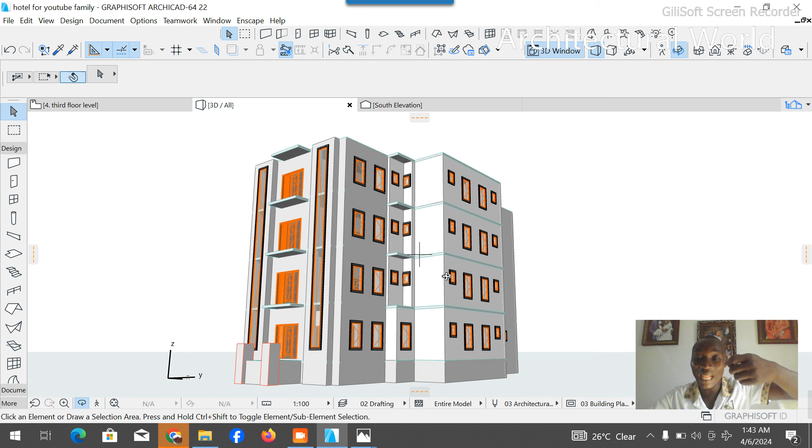In our next class, we're going to be changing, making the changes on the up floor, and elevating these columns upward, putting our lights, our rail, then with other little modeling, our fence and the stuff, then exporting to Enscape. So guys, don't miss out our next class. Love you guys so much. Thank you.